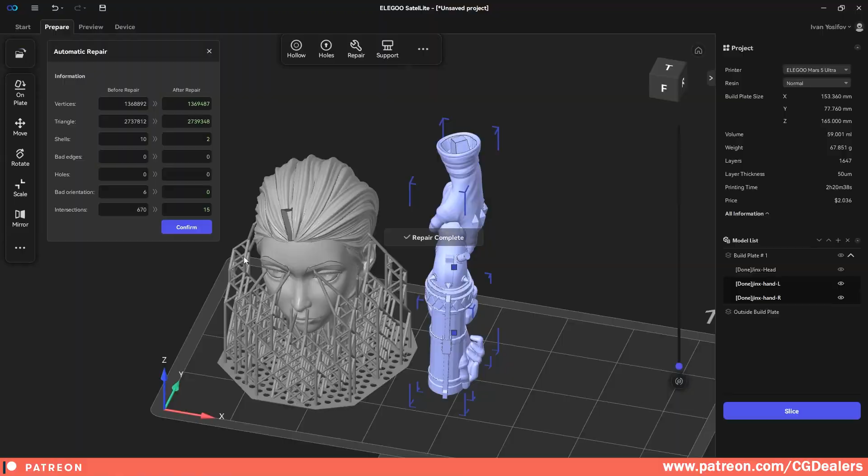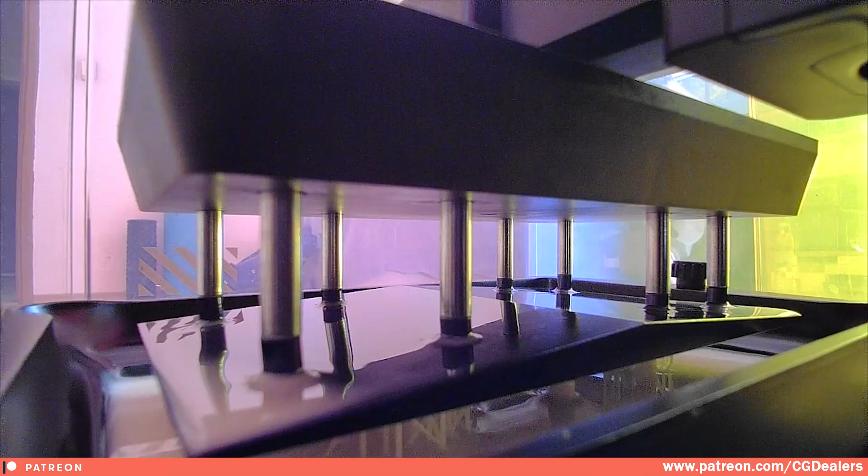In this video we are going to print this 3D Jinx model with the Elegoo Mars 5 Ultra. I'm going to show you how you can set up all the Jinx model parts inside the Elegoo software ready for printing, and the idea is to print multiple parts at once so we can save time. Later on we're going to review different accessories like the mini heater and the air purifier, and then I'll show you the final product after we print all the parts from the Jinx model. If you are into 3D printing, this video will be very useful.

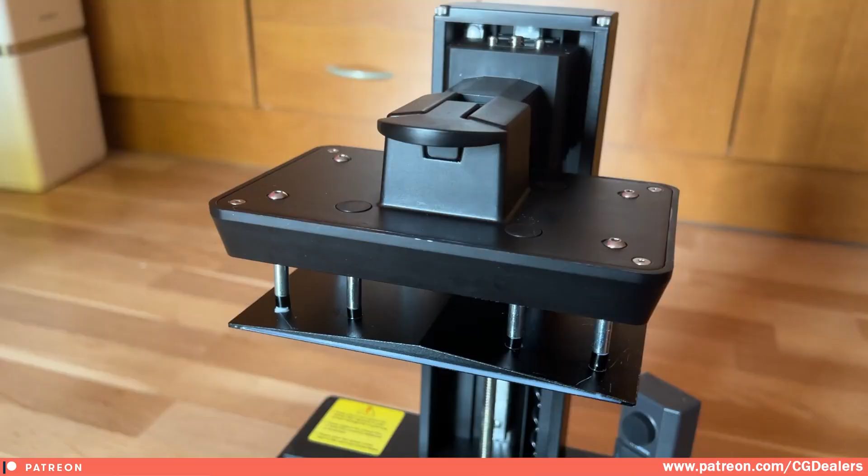The printing plate has this pattern on it, and here is the field where you're going to print your 3D models. The next thing is the bath. Here in the bath you're going to pour your liquid, and there are two screws with which you can detach the liquid bath - just unscrew this one and this one.

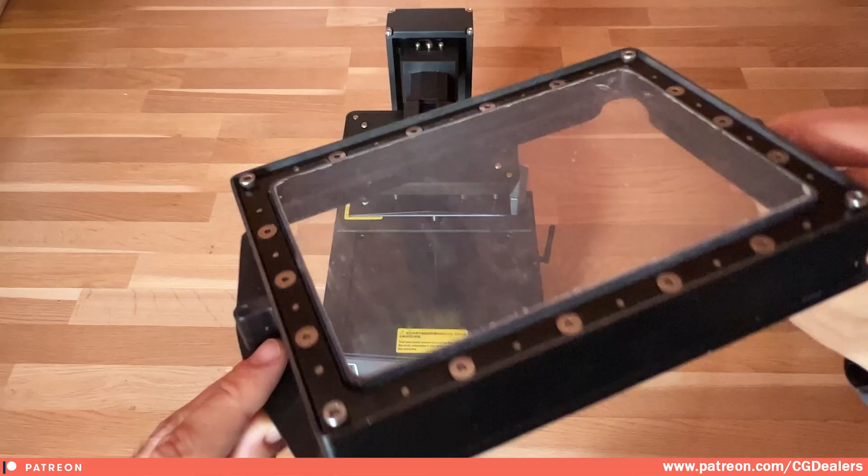Once you detach it, this is pure metal and it has a plastic cover underneath. Also, you have this marker for the max level - this is where your liquid should be maxed out, and you should not exceed the marker of the max. The other thing that you have is an AI camera, which will capture the time lapse.

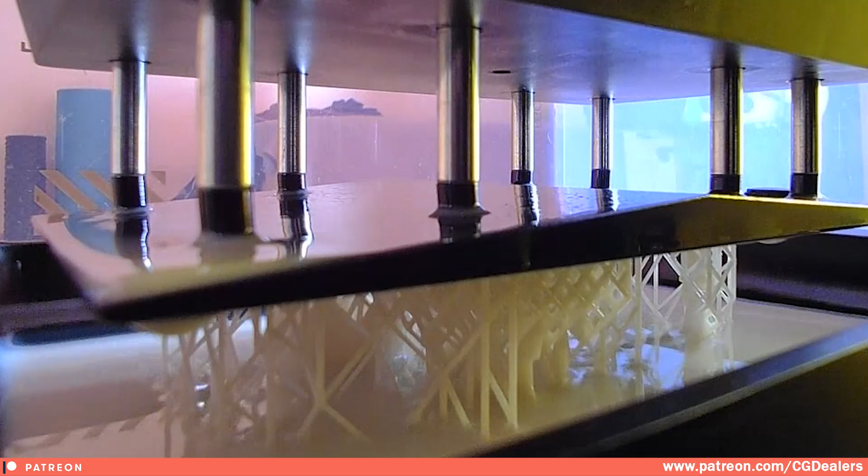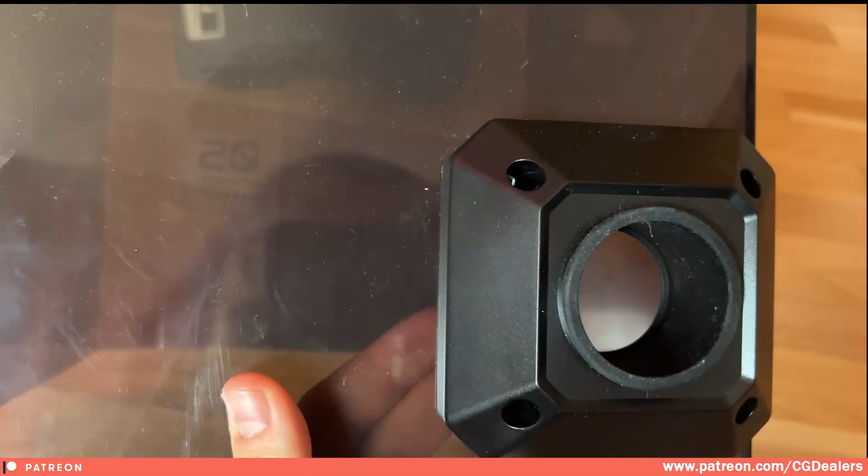On the side you can see it has a Wi-Fi antenna, and it has a DC adapter, a switch to turn off. On the back of the lid you can find a hole where you can attach different accessories.

Once you turn on the printer, what you have here at the top right is your Wi-Fi. It is connected to my local Wi-Fi network. The other thing is showing the degrees of the printer right now - so it is 21 Celsius.

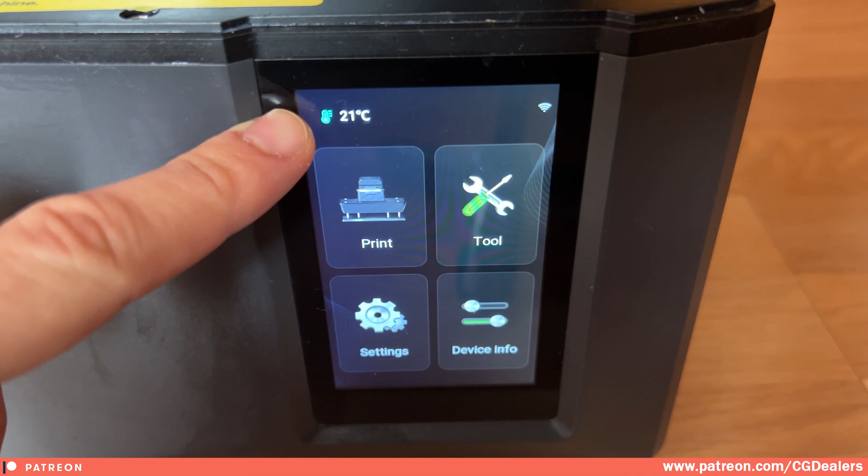Now if you go to the menus, into the settings, what you can do is change your language. Here at the Wi-Fi you can select your Wi-Fi network and connect to it, so you can control the printer through your computer. The other thing you can access is the app settings. Here you can factory reset, you can format the files on a flash drive that you input, and you can select from the temperature units, either Celsius or Fahrenheit.

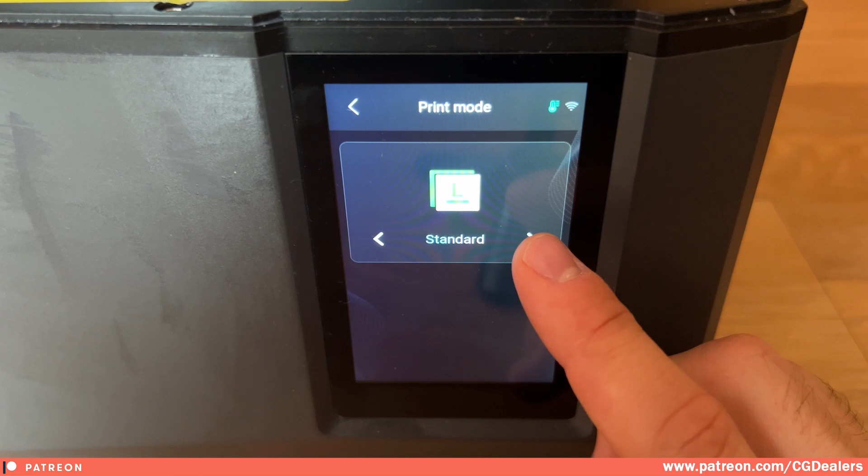If we swipe to the right, we have a print mode. You have two types of print mode - the first one is standard and the second one is high speed. If you need an element pretty fast, you can use high speed, but I recommend printing on standard. Then you have a version upgrade where you can check for updates.

Let's go under tools. The next thing is the LCD exposure time - from here you can test different exposures. The one important thing is the tank cleaning. When you are finished with your print, you need to go into the tank cleaning, boost it up to around 45 seconds and hit start. It will start creating a bottom layer which you can easily separate, and then your cleaning will be very easy.

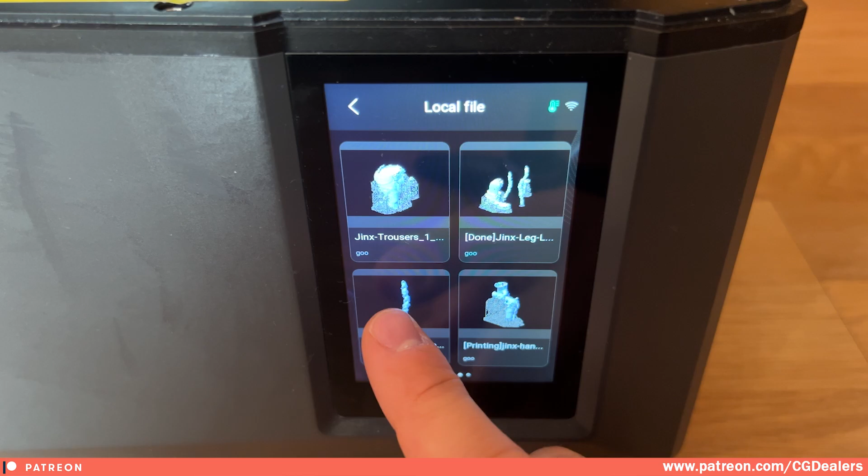Under printing, if we go to the local files, we can see here that I've imported different local files, and from here you can just select any of your local file and hit print or just delete it. So you can either print through your Wi-Fi network or you can use a USB drive and print on local files if you don't have Wi-Fi or internet.

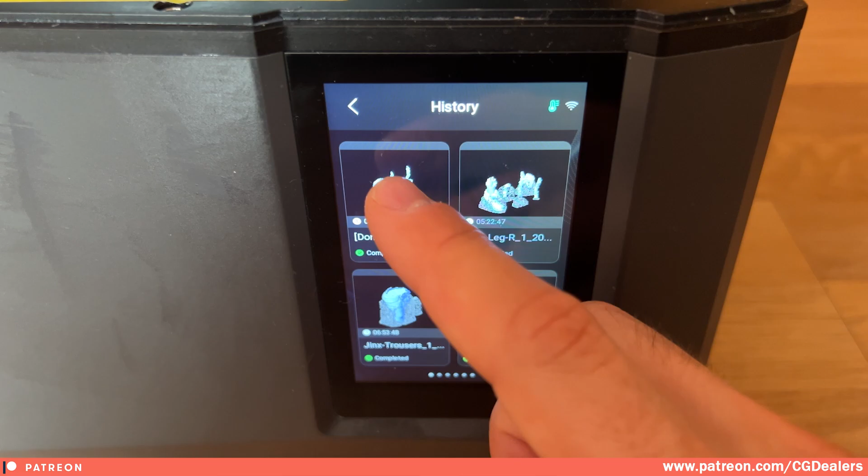So those are the basic settings of the Elegoo Mars Ultra.

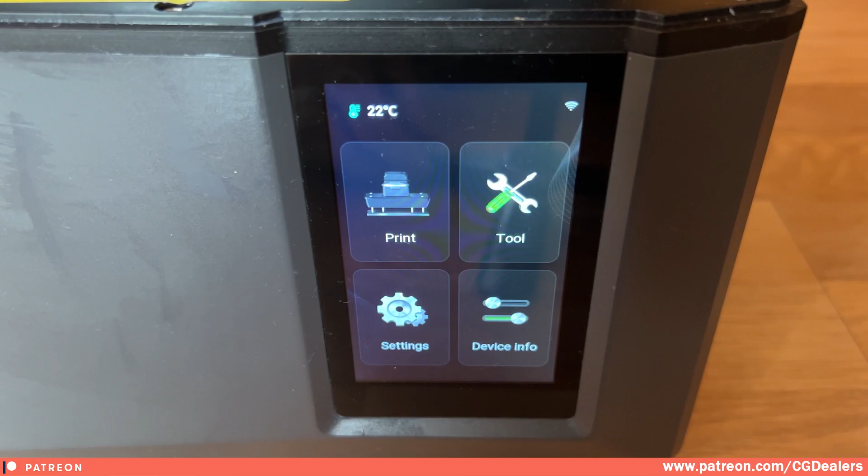The next thing that I want to show you is the photopolymer Resin, 3.0 plus. If we open the package, you can see we have 1 liter of Elegoo Resin, and this is a photopolymer resin, a white one.

The important thing is to shake up the bottle before use. Also wear gloves and a mask when using it, keep away from children and dust, and the recommended temperature for using this photopolymer resin is 20 to 25 Celsius. Very important, wash with plenty of water if you get skin contact with resin.

When I'm using this resin, I use self-care gloves. I always use this kind of glove, so it's pretty easy to place. You just work like that, and then throw the glove away because those gloves are for single use, and this is the safest way to use this resin.

So I highly suggest, if you are printing with this Elegoo resin, use self-care gloves. Those gloves are powder free, keep this in mind, and there are hundreds of gloves in one box and it costs like €5. The other protective gear that you must have is this mask.

So when you're working with resin, every time use a mask like this. They're pretty cheap and you can buy in bulk, maybe 100 of them, and always use a mask because the resin has a high smell and is toxic to your lungs. Always use a mask when pouring your resin or getting the print out.

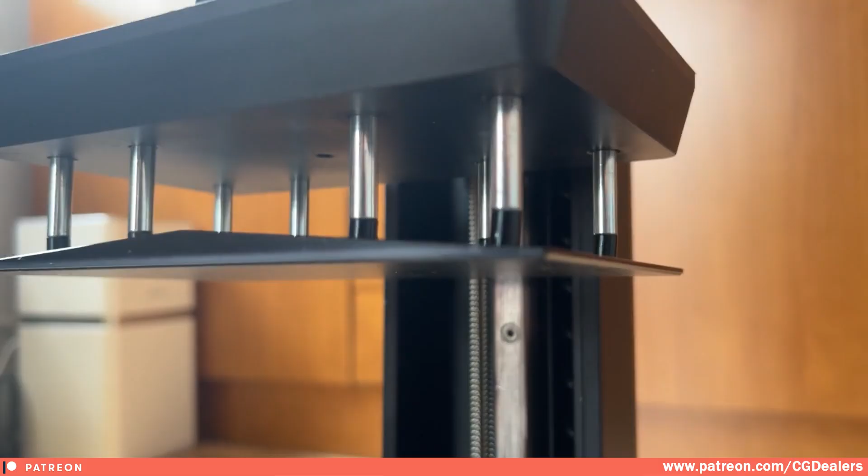The next item that I've got is a mini heater, and this one is super helpful if your room or the place that you're printing doesn't have enough heat and the printer cannot get between 20 to 25 degrees. What this mini heater looks like is a simple plastic rectangle, and here you set up the start and stop. Here is your power connector, and underneath you have a ventilator, which is detachable.

If I detach it, you can see a little ventilator, and by using this ventilator it is pumping air through the heater, and here it is ejecting the heat from the heater. The idea is you can attach this to your plastic box and start heating your printer inside. In this package you also have 2 additional small ventilators to replace the original one.

Once we connect it to a power supply like that, you just press this button, the heater will load up and start getting air from the bottom, sucking air, and it will extract heat from here. So this mini heater will heat up your printer if you cannot achieve the temperature for printing between 20 and 25 degrees.

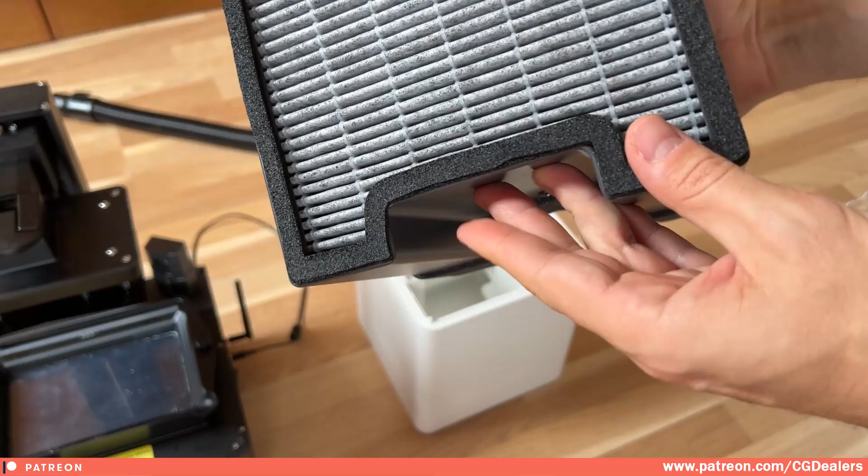So this is the air purifier enclosed, and this is the interface that is going to use. If I click this button, it is a touch button, it will turn on the air purifier, and we have this pipe, which we are going to connect to the lid of the printer, and from here it is sucking the air, going inside the purifier and cleaning up the air.

From here you can select two different speeds. This is high speed. If I click, we switch to low speed, which will be less noisy. On high, it will be more noisy, but it will suck a lot of air and clean it more.

There is also an auto option, so if I turn it on, it will automatically switch between fast and slow fan speed. And here under filter, when this indicator turns, it says that you need to change your filter. If you want to turn it off, just hold the start button and it will turn it off.

So in this box we have the wash and cure machine. It is designed and manufactured by Elegoo.com, and this exactly is the Mercury XS bundle. Let's open this box and see what's inside.

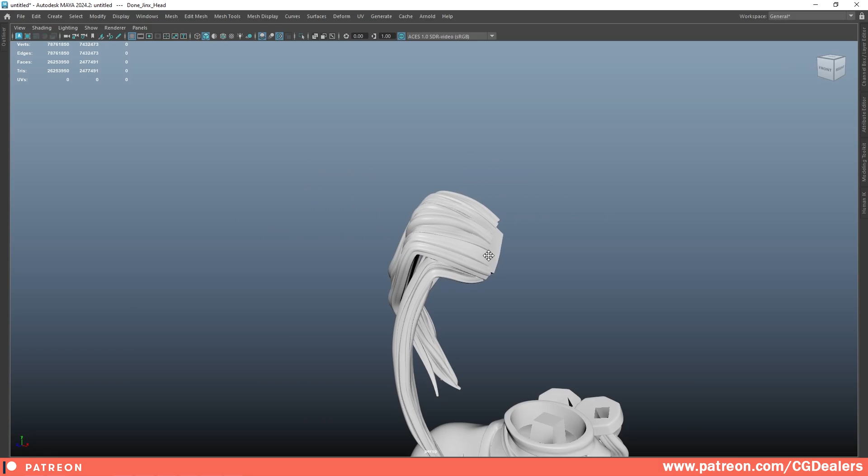So it is exported from ZBrush and modeled in parts. Here is the head, and if I hide it, each of the braids is on a separate model, and each is a separate printable piece because I'm printing everything on different pieces. The most important thing is to create connectors, so that later on when you're assembling the model, everything fits perfectly.

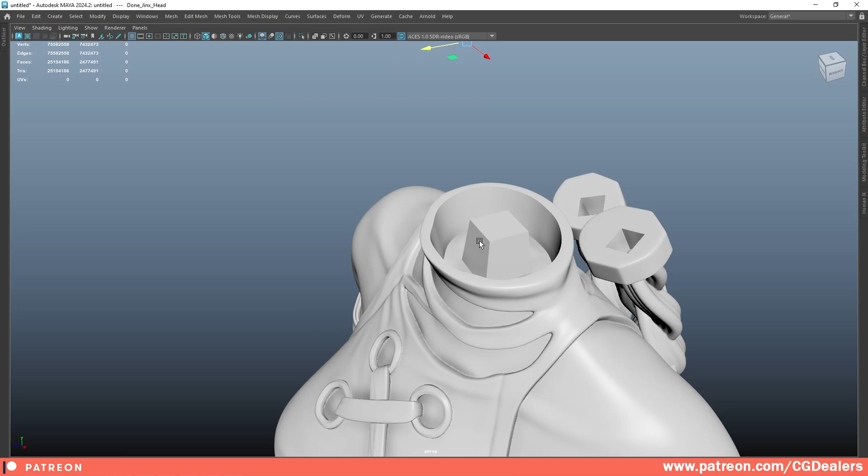So for this hair braid, if I hide it, you can see there is a cut, and this braid goes perfectly into this cut. This is the way you need to assemble the model. And if I hide the head, you can see another pin, so it can be assembled, and later on that part we can apply glue and stick everything together.

Those are separated into different parts. This is one printable object, this is the second printable object, and all of them have connectors. Let me show you - this is the third, this is the fourth. Those at the bottom also have connectors like that.

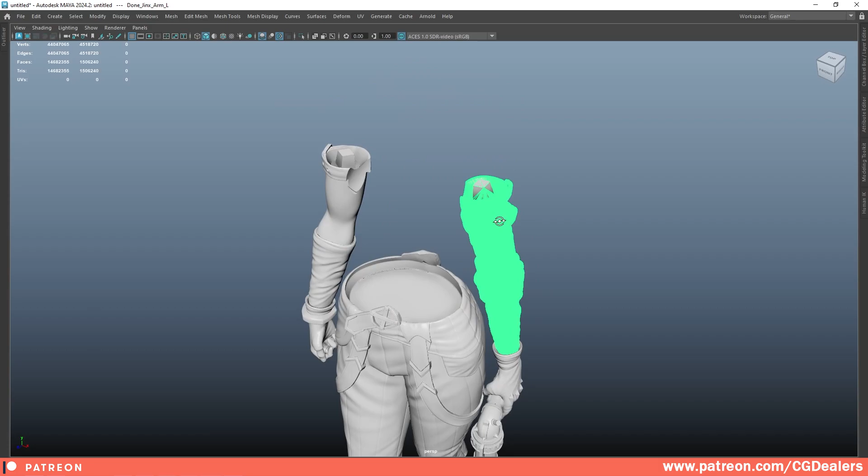And if I hide them, the torso is different - the torso is on a separate layer because we're going to print only the torso. Then we're going to print the arms, and we've created big connectors here so we can place glue over here. Then we have the hands - this hand is with the gun of Jinx.

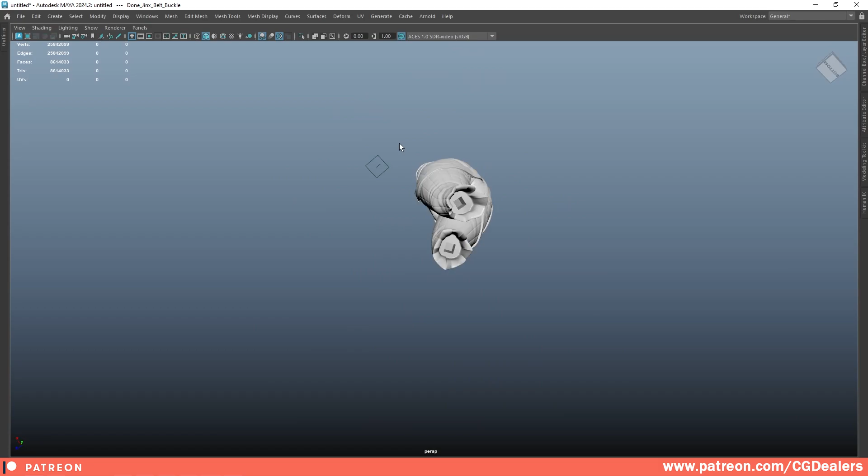The next arm is the same - you have this connector, same for this hand, and you can see how the connectors are hidden behind the cloth. Here are the trousers, and on the bottom of the trousers, another connector for the boots.

So right now we have this model ready from ZBrush to Maya, and what we need to do is export each part to an STL file. STL files are the files that the Elegoo software will read.

So I'm going to select this one. If you're using Maya, you need to go to Settings, Preferences, Plugin Manager, search for STL, and enable the STL translator. Then go to File, click Export Selection, and since I'm only exporting this selection, you need to select STL, then hit export.

So once I export this, I'll select this, export again, export this, export this, export this, and now I'm going to show you how to load the parts in the Elegoo software and what the settings are there.

So now let's take a look at the Elegoo software. This is the Elegoo SatelLite, and the first thing you need to do is add your device - from here you just click New Device. From here you can select many different printers. I'm using Elegoo, and in my case the Mars 5 Ultra, so I'll just select it, click next, and set it up.

When you set it up, your printer will appear in the device history, and once I click on my printer, I can see all the settings for it. After you set up the printer, the next step is to prepare your model for printing.

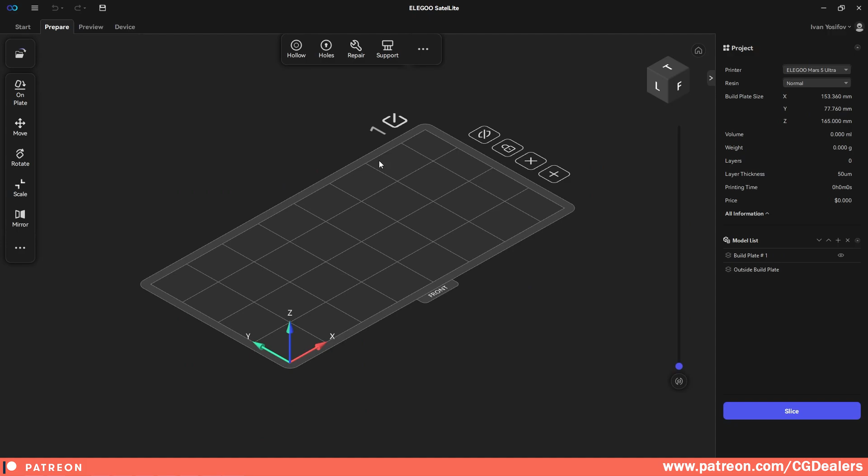Let's click on the second tab, which is Prepare. Here you can see the plate, the metal plate, and this is the front part of the plate. By clicking plus, you can add an additional metal plate.

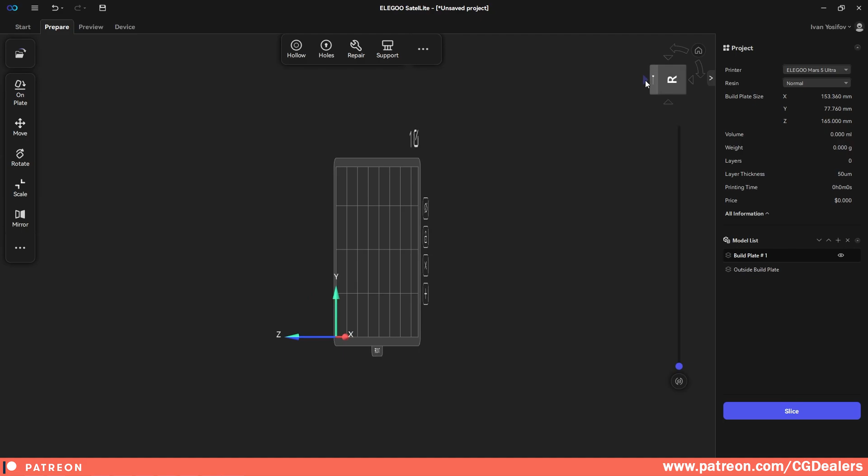So if I hit plus, you can see I now have a second metal plate. I can lock it, hide it in terms of visibility, and delete it with the X button. Right now we're working with one plate since we have one printer, but you can set up multiple plates and send different printing setups to different printers. Since I'm working with just one printer, from here you can name your different printers - let's say this is printer 1 - and name all the plates you want. From here you can change the view - top view, right view, left view - just like in any 3D software like Maya, Blender, or Max.

So let's add the STL file. The easiest way is to select your STL file and drag and drop it into the printer. It will load up, and the next thing we have is model damage detection, to perform automatic model repair. What this means is that in ZBrush, when this model was created, it has different kinds of faces - triangle faces, quads, five-sided faces, etc. - and what the Elegoo software wants to do is repair your mesh.

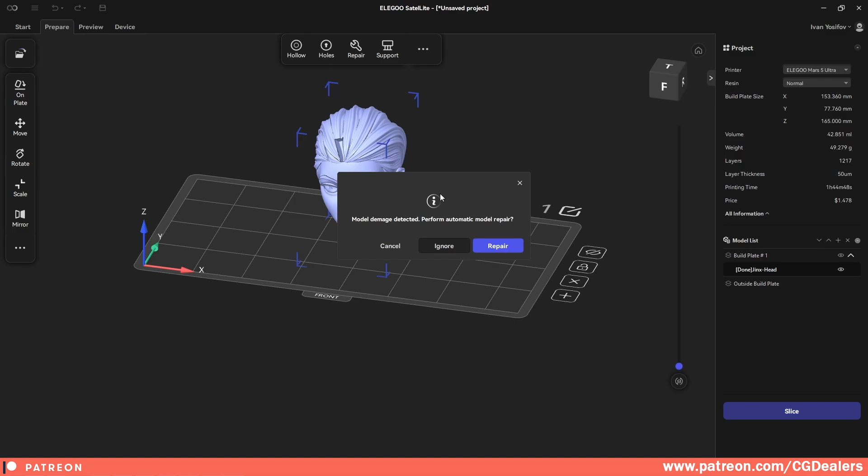Just click repair, and it will start checking for errors and automatically repair your geometry. No need for you to go into Maya or Max and start cleaning up your geometry. After the automatic repair is done, you can see the results: we have shells, bad edges which are repaired, holes, bad orientation, etc. The software fixed everything for you.

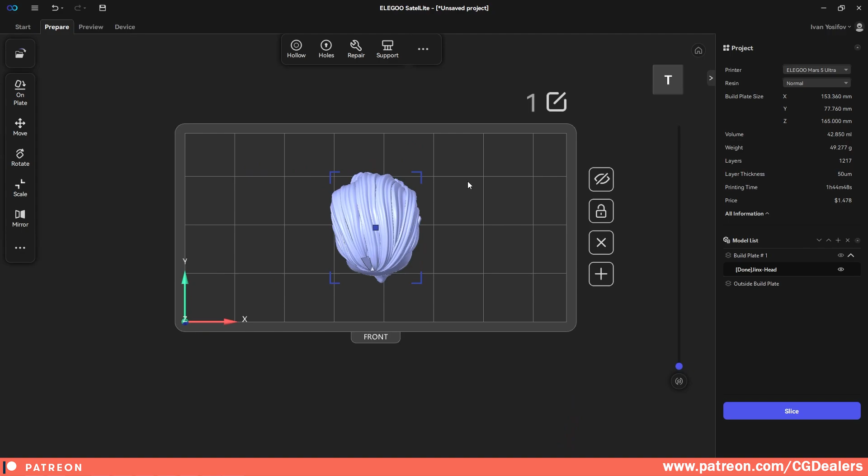Just hit confirm. Right now this is our selection head, so what you can do is go from the top view and start moving it around. What we can do here is print multiple elements onto this plate.

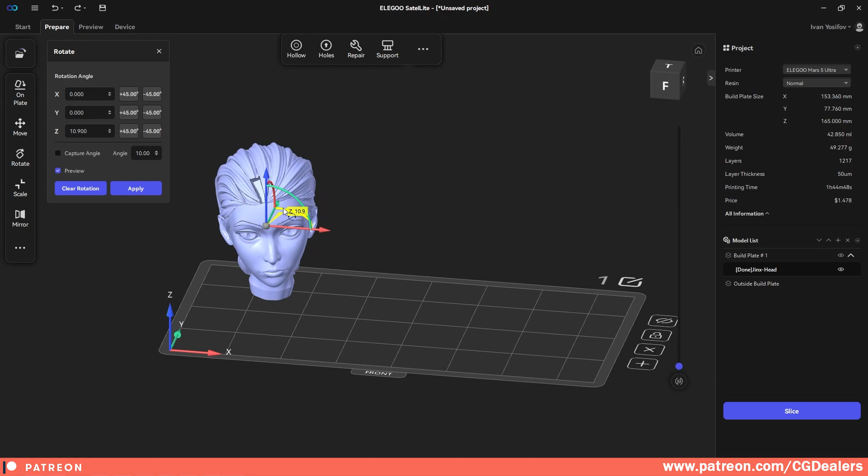Let me show you the other features before we start adding more files. From here you can select the move tool and move it, maybe place it on the build plate, move it to the build plate center. From here you can start rotating it like that if you want, and you can clear the rotation. From here you can start scaling it up.

You have the size in millimeters, and here is the original percentage size. You can scale uniformly, or disable the uniform scale and start scaling on different axes, and here we have the preview. If I put something like 200, you can see the preview of how this will be scaled up when you hit apply - it will start scaling up uniformly. So if I want the head to be bigger by 50%, I can do that.

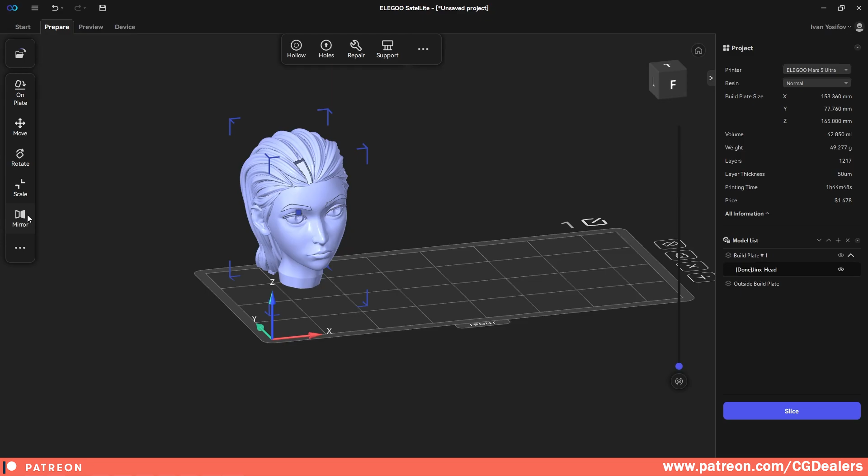The mirroring mode is very useful, for example if you're making hands and you want to mirror them in different directions. Select your model, click on mirror, and click preview. Click any of the arrows, and once you click it, you can see that it starts mirroring it to the opposite side. Let's click this one, and this one. By hitting apply, you can copy the original model and have one more mirror of the model.

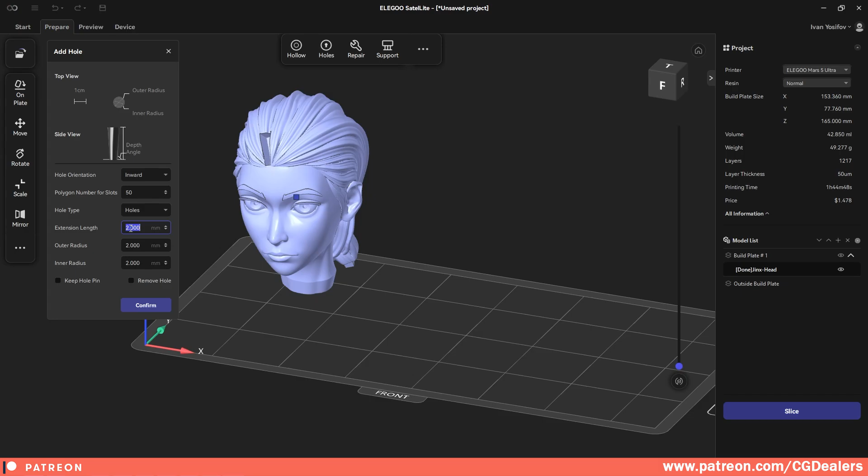The next tool palette is here. You can make the model hollow, and you can also make holes into the model. If I select the hole and extend the length to, let's say, 50 millimeters, I can make holes into my model. If I click here and then click confirm, it will make a hole through my model - like a spear, it just penetrates it. This might be useful for you, but for this model, it's okay not to use holes.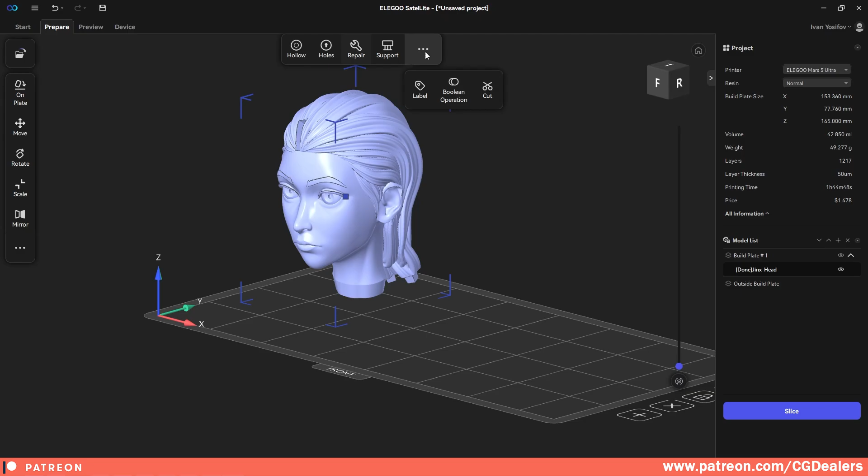Right now what we've done is repaired the model, and if we orbit, you can see that the connector is placed on the grid. A very useful thing when creating characters like this is to add supports, and those supports are important for your model to get out correctly of your printer.

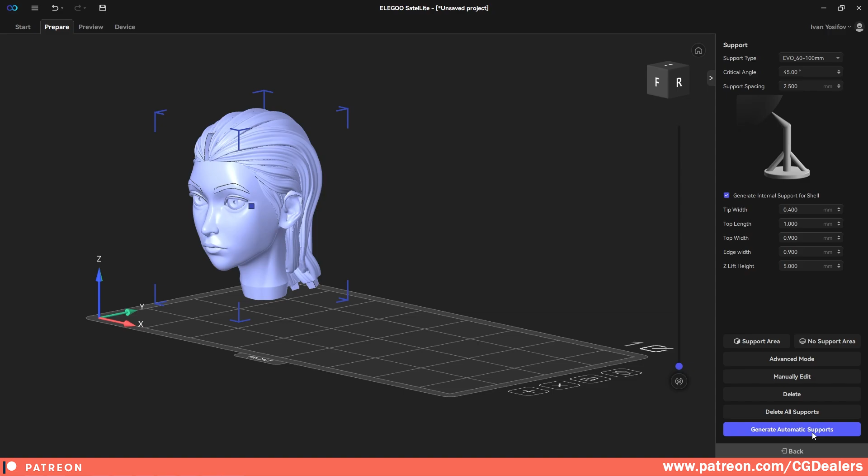So what I'll do is click support, and those are the supports. There are a lot of settings you can set up here, but I'm just going to generate automatic supports. In 95% of cases, this just works straight out of the box. Click generate automatic supports, and it will start generating supports which help with printing. Later you'll just remove them from the model, and it's super easy since the support connectors are super fragile - with just a very soft, gentle push they detach from the model.

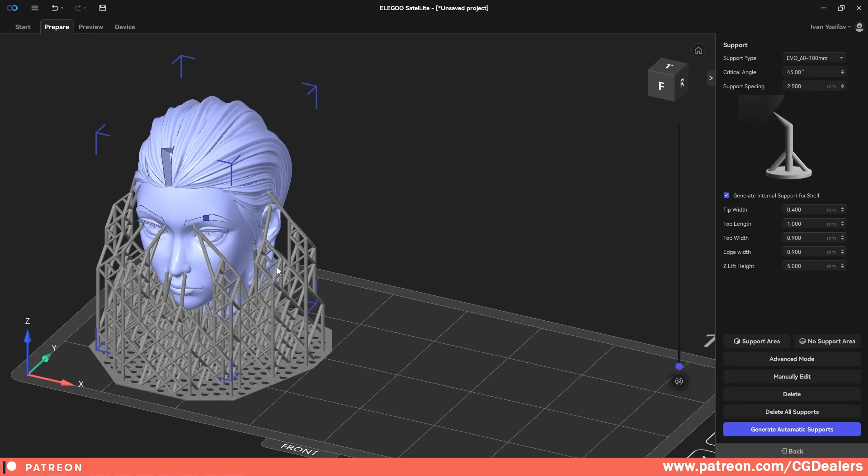So those are all the supports that are going to be printed. Let's go from the top view - you can see the plate is a little bit bigger for the printing, so I'm going to move it like that, and hit back. So we've prepared one of the models.

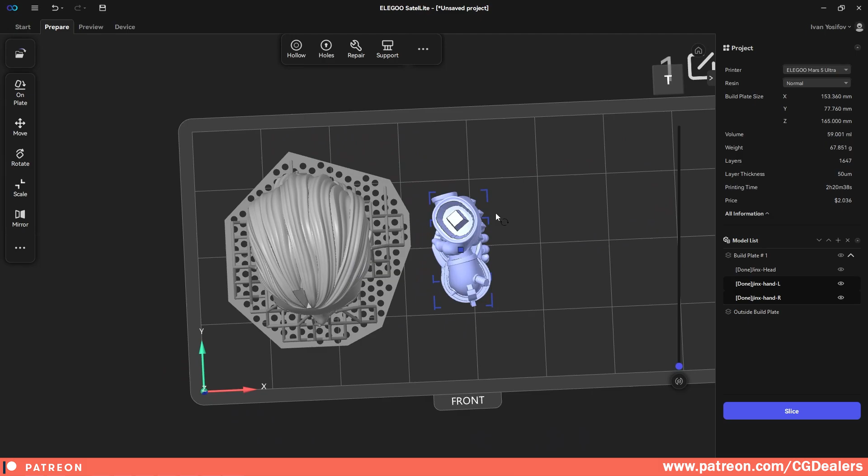Let me show you how you can add multiple models. Let's add the left hand and the right hand. I'm going to select those two, drag and drop them over here, and once the repair process is completed, click confirm again. Right now the two models are penetrating each other, so I'm going to left click and start moving them like that, and like that.

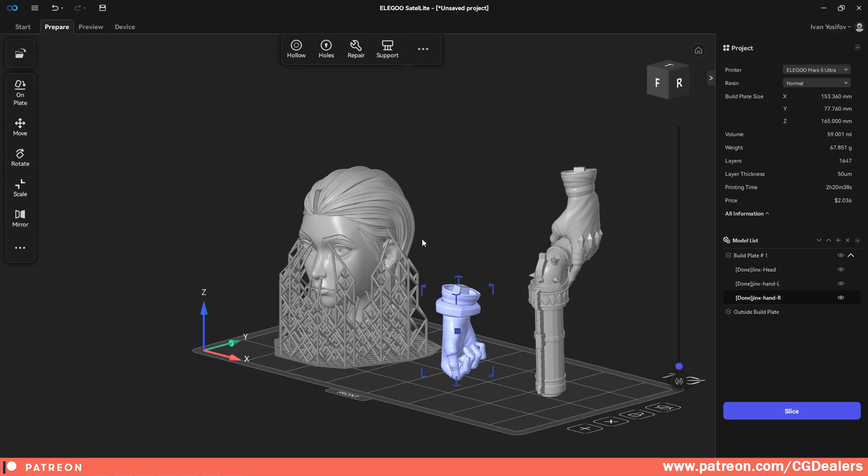As you can see, those models still need support because only the knuckle here is the first layer that starts printing. I'm not saying it's not going to print, but it's kind of risky to let it print like that, so I'm going to add a support to this one - generate automatic support.

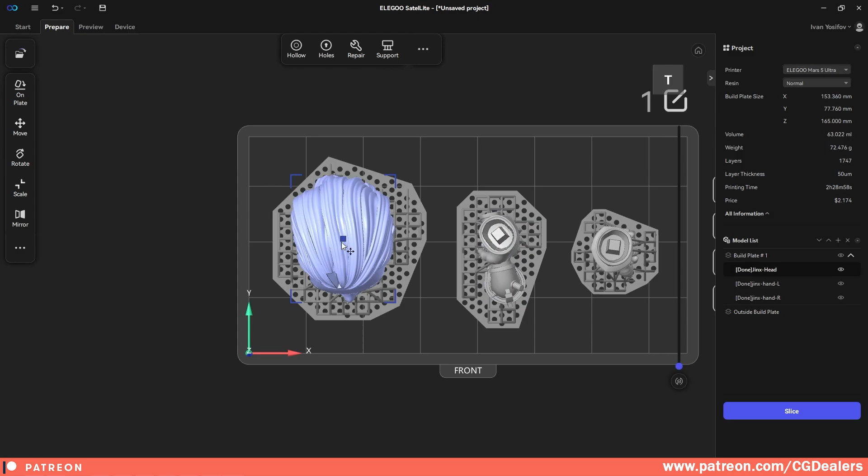Alright, so we have support on this one, and I'm going to add support to this one too - generate automatic support. And let's move them around so we can have great spacing between them. I intentionally left more space between them because I don't want to penetrate each one.

So something like this. In this batch I'm gonna print those three in one single print. From this slider you can see how the printer will start printing them - first the supports, then the model itself, and it will be finished. It will require 1747 layers, which is 87 millimeters. On the right side here, you can see all the details for the print.

Which printer are we going to print? I just have this one, but if you have multiple printers, you can select different. This is your resin, this is the build plate, this is the volume, the weight, the layers that are going to be needed, the layer thickness. The printing time will be 2 hours and 30 minutes, and the price of the print. So I'm just gonna print those three for $2, which is super cheap.

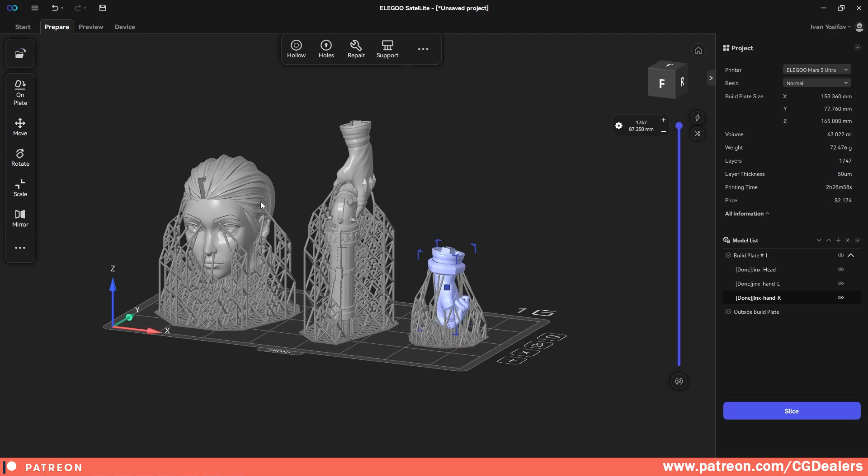The next step is to slice it. In order to slice them correctly, you need to select all three of them. So I'm gonna select the hand, hold shift on my keyboard, select the pistol with the hand and the head. And then I'm gonna click slice.

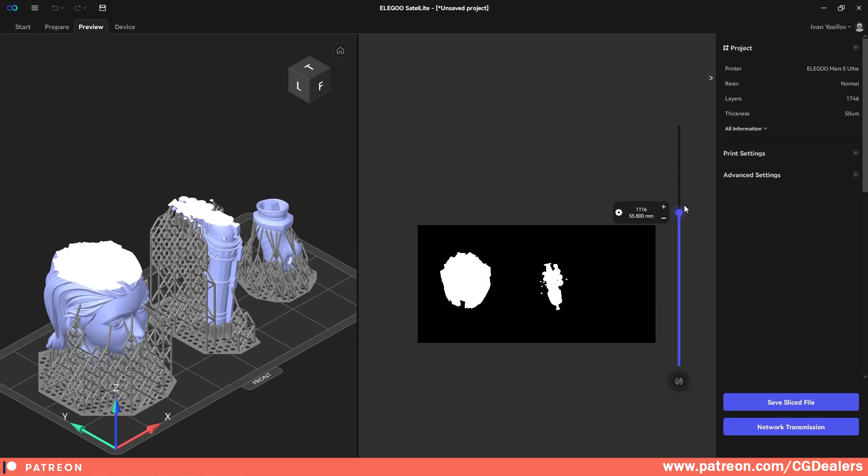If you have Elegoo Mars 5, which I think is one of the best comparing price to quality, you can use the network transmission, or you can save the slice file to a flash drive and then load up the files through the USB port on your printer. But I'm just going to use the network transmission.

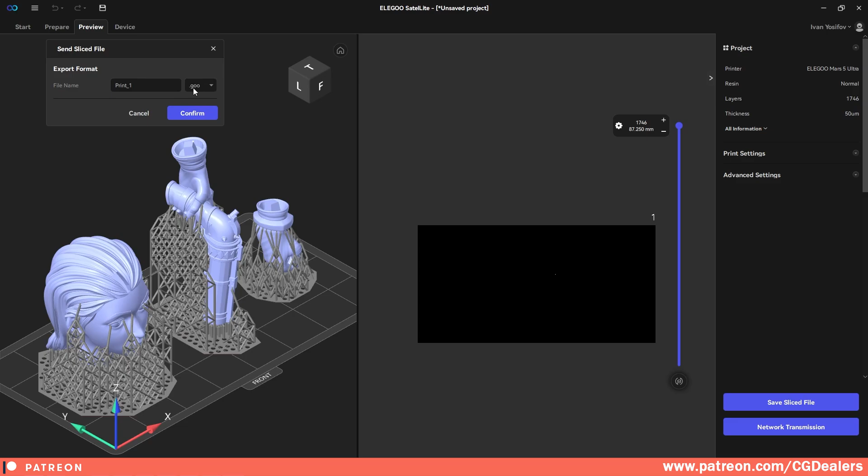Once you click it, you need to select a name for your printing. So let's say this is print, and the format for the printing is .goo, and then I'm going to hit confirm. After the export, what you have here is the list of all the printers that are added, and you can just select the printer that you want and send the printable file to it.

Also, you can turn on or off the time lapse - this is when the printer starts printing, to use the AI camera for time lapse. Let's send the file by clicking send, and the information starts sending. Here in this progress bar, you see how the sending process is going to work - right now 25%, 30%, and once it's finished, I'm going to show you how you can start printing.

Once the file is successfully sent, you just need to hit print and the printer will start printing.

So this is the final print of Jinx, and as you can see, it is super big. If I compare it to my keyboard, it is almost the length of an entire keyboard. Let me show you a closer look.

Everything is super smooth, and you can see all the cloth wrinkles. Let me show you the torso. The stomach is also great.

There are a few different things that need fixes, like those, but those are created from the supports and I need to clean them up. But overall, the print is super good.